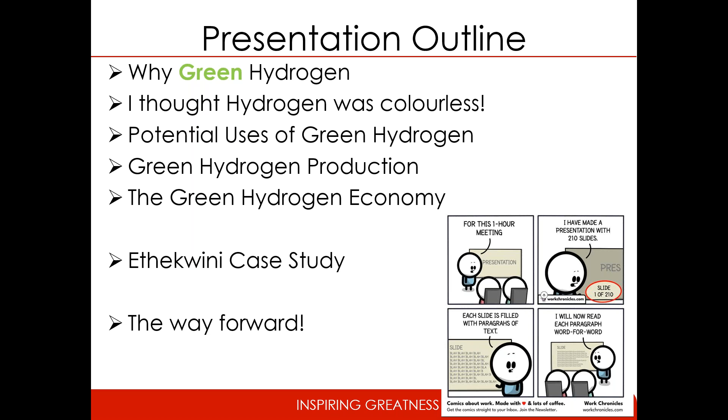We'll talk a bit about green hydrogen production in terms of electrolysis, etc., and then the green hydrogen economy, how it exists throughout the world, perhaps. Then I'll hand you over to Umeshan, who will go through an eThekwini case study, which is very relevant. And I don't think I'll say too much more about that because I think Umeshan covers it quite well. And then because I like to always have the last word, I will come back to end the session off before we have the Q&A.

So why is green hydrogen trending? Obviously, everybody knows most of the stuff. It's a growing demand for clean energy solutions, the shift towards decarbonization, and obviously advancements in technology and declining costs of renewable energy go hand in hand. We find that solar efficiency is getting better. We find that people are finding ways to make renewable energy more efficient. Hence the reason green hydrogen now is a buzzword almost. In the next slides, I'll show you specifically why those things are important.

But also the government policies that support green initiatives. They're growing not only in South Africa, but you'll see the example that I use for Japan later on in my slides, is something that is saying, look, if we want to meet the climate targets by 2050, then we need to consider very serious ways of decarbonizing our industry.

So this is the hydrogen color spectrum. You'll notice at the top we have green and pink hydrogen. Green and pink hydrogen are the only greenhouse gas-friendly hydrogen production mechanisms. Currently, hydrogen is mainly produced using coal or gas, which adds to the greenhouse gas emissions because it releases carbon dioxide as an output.

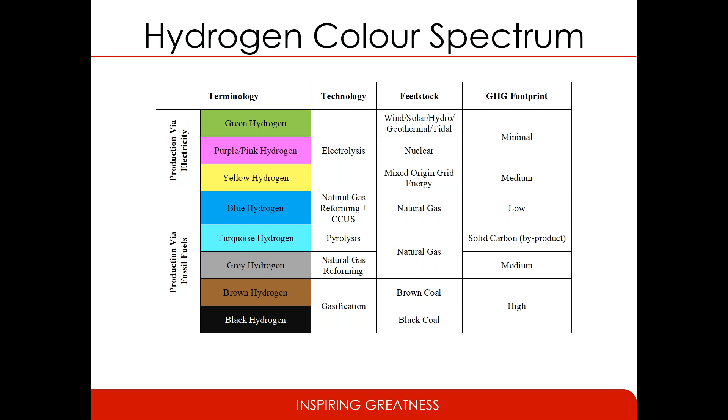But the difference here is that this is a CO2 emission-free option. So they basically don't add oxygen into the mix, and therefore no CO2 is created. So the carbon that is created is then used for nanotubes and other functions as well. But I digress. Let's move back into the presentation today.

I'm starting off by showing the United States energy mix. And the reason I'm showing it is to address the first question that I discussed when I talked about the outline. And that question was, why are we taking renewable power and using it to make green hydrogen rather than just providing energy?

Now, this is the US energy mix. And you can see in the US energy mix, electricity basically makes up 25% of the energy mix, the rest being transportation, industry, etc. Now, in industry, there are certain industrial sectors like the manufacturing of steel, for example, that are really difficult to decarbonize using electricity. And therefore, that's where hydrogen comes in.

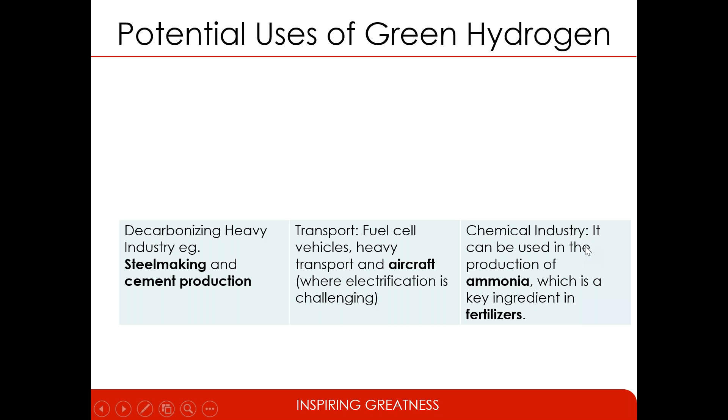So potential uses of green hydrogen, and perhaps that's where I'll discuss it further, is the decarbonizing of this heavy industry. So steel making, cement production, for example, you can now use the hydrogen directly as heat rather than electricity. And I think that's the reason why green steel is kind of also on the rise on the backs of green hydrogen. When we talk about transport, fuel cell vehicles, heavy transport, and aircraft.

Now, aircraft is, for me, like the easiest example because it's very, very difficult to electrify an aircraft. To do so, you may need batteries that are heavier than the aircraft itself, if I could put it that way. So it just doesn't make any sort of feasible, viable sense. Therefore, this is where hydrogen is kind of playing a big part, although there are plans in place for heavy fuel cell vehicles like shipping and trucking, etc.

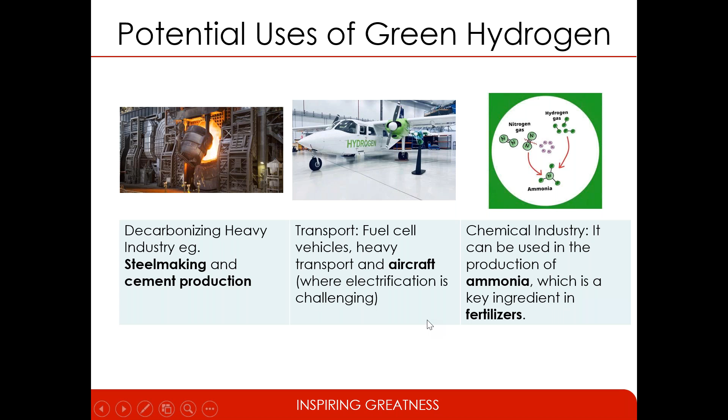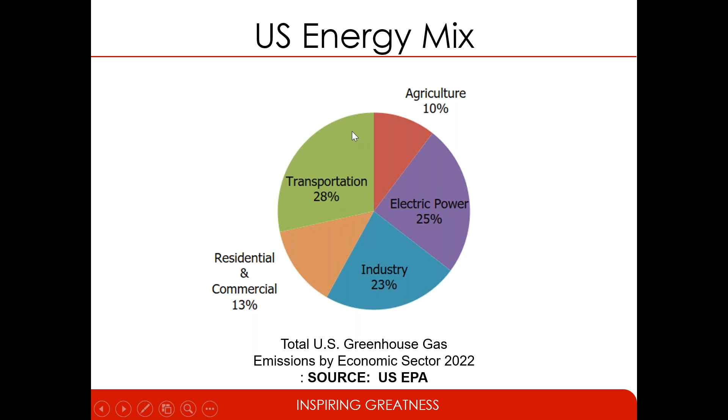As well, the chemical industry can use it in the production of ammonia, a key ingredient in fertilizers, for example. So these are the potential uses for green hydrogen. If we were to go back quickly, just to say, the idea, if you could see my mouse, is not to target this electric power, but to cut into the industry 23% and the transportation 28%. Transportation, we obviously have electric vehicles that's also helping out. So I think that's the reason why green hydrogen is making sense.

Now, I started off with America, but now we can come back to South Africa, and I'll quote a very famous graphic that we see in a lot of presentations these days. It's from Stellenbosch University, from the Center for Renewable and Sustainable Energy Studies. And as you can see, we have a growth now in terms of concentrated solar power, we've got wind power, and we've got solar power. But of course, this is our electricity generation. And what we can't see is underneath this white line is a lot of brown.

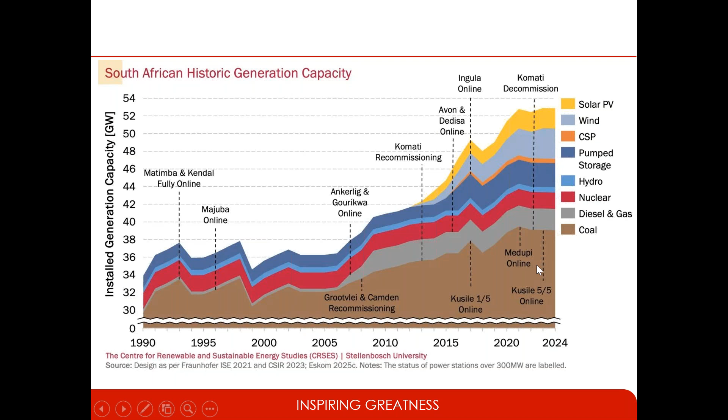So in terms of renewable power, the reason why this graph is very different from the American graph is you'll find that in our energy mix, electricity still makes up a much bigger proportion of the energy mix as opposed to industry and transportation, because of how dependent, of course, we are on coal for our electricity.

Now, when we talk about the green hydrogen economy, for me, we have to start with Japan, because in 2017, Japan became the first nation to implement a national hydrogen plan. And it's kind of obvious, it's born out of necessity, because Japan is limited in unused land, which means that Japan, unlike South Africa and other countries, can't set up gigantic solar farms like those found in Australia and China and India to decarbonize their grid or to meet their carbon KPIs.

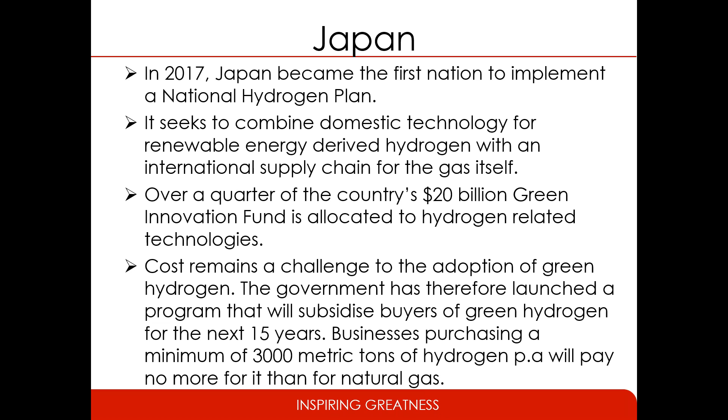Other countries around the world have similar initiatives, but we won't go through all of them in the interest of time. To talk about South Africa, South Africa's current vision is stated in the South African Hydrogen Society Roadmap, which was released in February 2022.

Establishing a hydrogen economy for South Africa is seen as a tremendous opportunity to overhaul the country's industrial sector and also assist in achieving our targets for 2050. The other thing is that it ensures that the socio-economic inequality is also alleviated. You may have heard the term just energy transition, because I'm assuming people who are in this webinar are interested in such things. So green hydrogen is seen as one way.

In fact, we are also currently writing a book chapter with the Human Sciences Research Council on green hydrogen, specifically looking at how the just energy transition can be assisted by going to green hydrogen rather than renewables only. So this roadmap establishes targets for the year 2050, but plans to implement 10 gigawatts of electrolysis in the northern regions of South Africa by 2030.

Now, I know the cynics in the room are thinking, and perhaps those are the questions we're going to get later, but those targets seem lofty because let's face it, 2030 is now 5 years away. But at this point, I'm going to say, is it any more ambitious than us building 14,000 kilometers of transmission line in the next 10 years?

My point here is not to belittle it or to say that we're not going to do either, but my point is, and I'll touch on it at the end of the presentation, is that we need to have plans in place, and not only plans and documents and more reports, but we need to start executing on them.

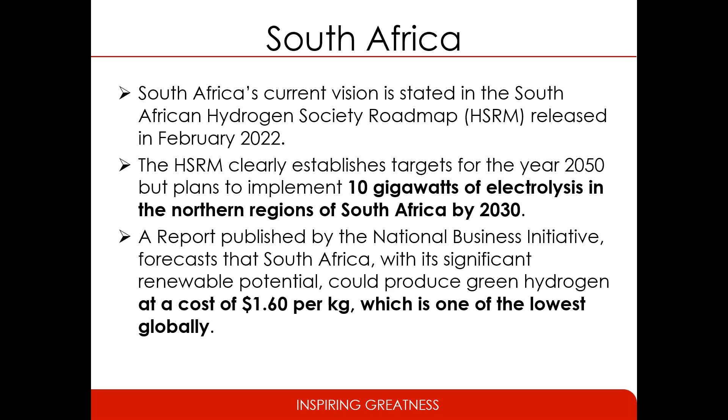A report published by the National Business Initiative forecasts that South Africa, with its significant renewable potential, particularly in the northern provinces, could produce green hydrogen at a cost of $1.60 per kg, which is one of the lowest globally. So that's in terms of South Africa. The South African projects that I'll just touch on briefly: the Platinum Valley Initiative, I think, is the most famous one. It's the big corridor that links the mining activities in Limpopo all the way down to the port of Durban.

Then we have the COALCO2-X project, which aims to utilize green hydrogen and captured pollutants from coal-fired boilers to generate value-added products such as green ammonia and fertilizers. Sustainable aviation fuels, I think we've spoken about that already. And I apologize if I don't pronounce this correctly, the Boegoebaai hub, which is in the Northern Cape.

This is a nice example of a hub that looks at a lot of different interconnected industries in a way to stimulate the economy, generate jobs in an area that doesn't have anything. And it's a large-scale industrial zone. It has 7 crucial facilities, but most important in the context of this presentation is an electrolyzer park, a green ammonia production plant, and a desalination plant.

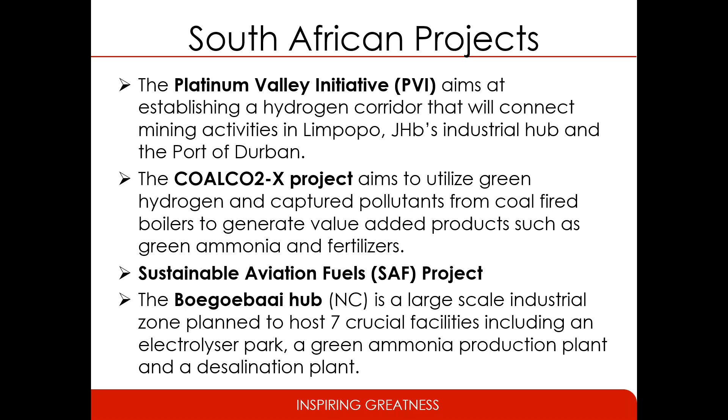So South Africa has these plans, and perhaps I'll now trail off. I warmed you up, hopefully, in terms of understanding what's green hydrogen and why we're doing it. We'll now segue to Umesh's presentation, where we talk about an eThekwini case study. And the reason why we chose to look at this case study is obviously eThekwini forms part of that platinum corridor, but also when we're designing these things, we need to understand what we're doing, why we're doing it, and should we be doing it in the first place. And Umesh's study answered a lot of those questions.

I'm really grateful to the SAIEE to afford us this opportunity to present this research to you, because research like this doesn't just belong in a thesis or in a conference paper. It needs to be shared, discussed, and I feel only then can we have any chance of it being implemented. So with that, I'd like to hand over to Umesh, who will take you through the very technical details of his study, and I'll chat to you guys later. Thanks.

Thank you, Dr. Khan. I'd like to introduce Umesh Pillay to the audience. Umesh Pillay is an electrical engineer with a diverse skill set encompassing various areas of expertise. His proficiencies include black start generation, industrial energy audits, general industrial engineering, network modeling, renewable energy, medium voltage designs, arc flash studies, and MV protection coordination studies. Umesh demonstrates high analytical acumen and problem-solving abilities, allowing him to define complex issues and devise innovative solutions meticulously.

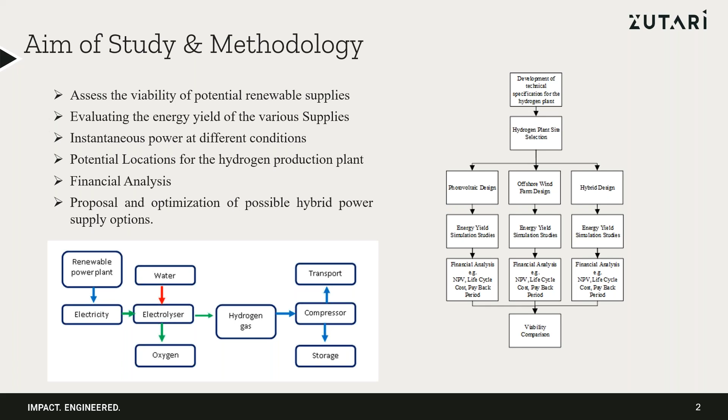Okay, so the study locality and plant requirements. I'm not sure if everyone knows that eThekwini was one of the first municipalities to release a regional hydrogen strategy. In our national hydrogen strategy, we have Cato Ridge, Richards Bay, and Durban as the hydrogen corridors. I chose to do my research based on Durban because I'm actually from Durban, so it made it easier.

Durban was also one of the first municipalities to produce a regional hydrogen plan, and the Durban port means, as I said before, the only possible use for hydrogen at the current moment is export, and I felt that would be the easiest.

For our plant, we had to look at industry benchmarks of what other plants are producing. We've seen that a typical plant produces like 2,000 kilograms of hydrogen a day.

This fact actually scared me when I saw 20,000 liters of water required, and I was like, okay, I live in eThekwini, and when I open the tap when I get home, we do not have water. How are we going to do this? Then I realized there's something bigger in play here.

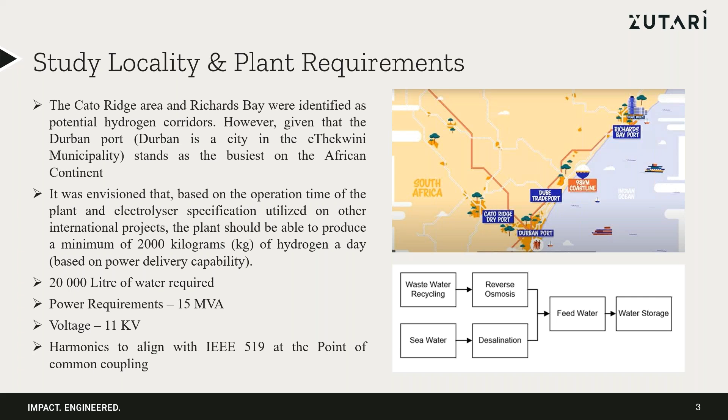Okay, let's look at photovoltaics as a potential power supply. We all understand that PV doesn't function throughout the day. So in our study, we looked at operating our plant for 9 hours from 8 a.m. to 5 p.m., a typical working day.

One thing that really made me know I was on the right track - I'm not sure if you guys have seen on LinkedIn the recent eThekwini updates. I was actually in a meeting with them, and ironically we were talking about this 400 megawatts of generation they aim to install: 100 megawatts of solar and 300 megawatts of gasification, I think. Ironically, this 100 megawatts of solar was in the same region that I had placed my solar farm during my study, so I knew I was on the right track there.

As you see from the global horizontal radiation map, Durban is relatively green, so that's about 3.6 kilowatt hours per meter square of solar energy.

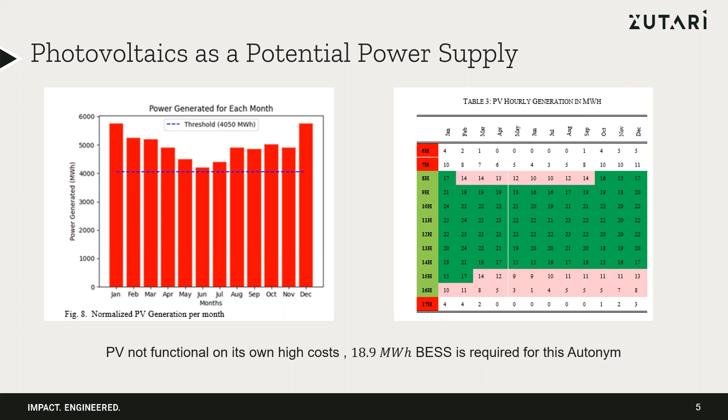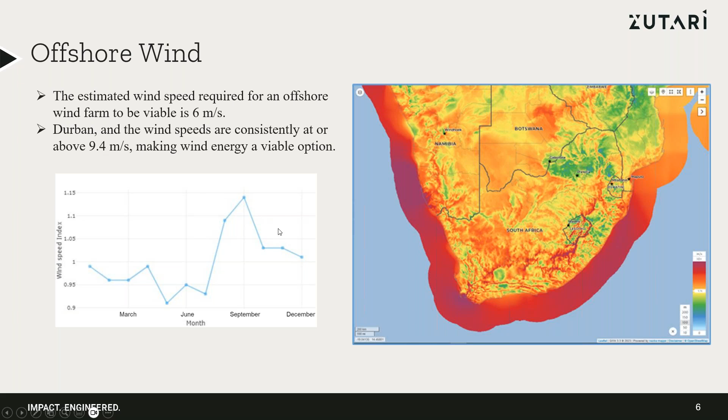So I'm very passionate about offshore wind, synchronous machines. For any offshore facility to be viable, we require 6 meters per second of wind speed. As you could see, the coast of Durban is relatively red, about 9.4 meters per second. Looking at the wind index chart throughout the year, the wind speed drops towards June, but the wind index is a per unit value, 1 of the average wind speed, so it'll be 0.9 times 9.4 meters per second, which is not a massive train smash. We can still get the instantaneous power that we require.

Okay, so here's the thing with wind. Based on the power curve, we see a cut-in speed of about 4 meters per second, and we have 6. Looking at the power curve and extrapolating your points, you get 5.5 megawatts of power per turbine. I think to fulfill our 14.3 megawatts we require 4 turbines, but it's actually 3.1, and it's just safer to put 4 turbines as a contingency. As you can see, there's no issues with the instantaneous power, it's all over 14.3 megawatts. Perfect, we're happy there.

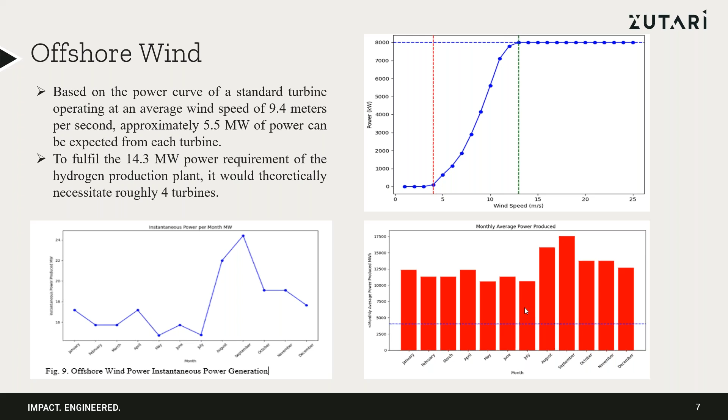But here's the issue: over generation. If you look at the amount of power we require per month, it's about 4,050 megawatt hours, but we're producing, on our worst month, about 11,000 - that's almost 3 times the generation required. So that's not good, so you have to ask yourself what do we do here. So we looked at possible solutions: PV is under generating, offshore wind is over generating. One is doing what it's supposed to do, one is not, one is doing it better, one is just there.

So the way to do this is a hybrid solution. That's our first solution, where we had a 35 megawatt solar farm tied to an LV collector, stepped up to 33 kV - general electrical engineering, step up to higher voltage to limit your power losses and assist with your voltage drops. We fed 2 renewable feeders at these plants, we actually have single line diagrams of these plants drawn out. So 2 feeders, again for redundancy, and the same with the offshore wind farm: 32 megawatt offshore wind farm, 66 kV. This is because you ideally want to transmit at your highest possible voltage within limits. Then the same, fed into 2 renewable feeders. Remember, this is 2 different power supplies.

Then we said, okay, let's look at combining an offshore facility with a solar facility. So the easiest way to do it is to take the offshore wind farm and the solar facility, and we went on with our study like that. So we looked at the energy analysis. We saw that the hybrid solution continues to generate excess power from this graph, while 2 turbines deliver the required megawatt hours but do not meet your instantaneous power. Remember, we need 14.3 megawatts of instantaneous power to run the plant, however with 2 turbines we're just getting 5.5 each, so that's 11 - that doesn't make sense. So the hybrid approach offers a balanced solution, both financially and technically better than each other.

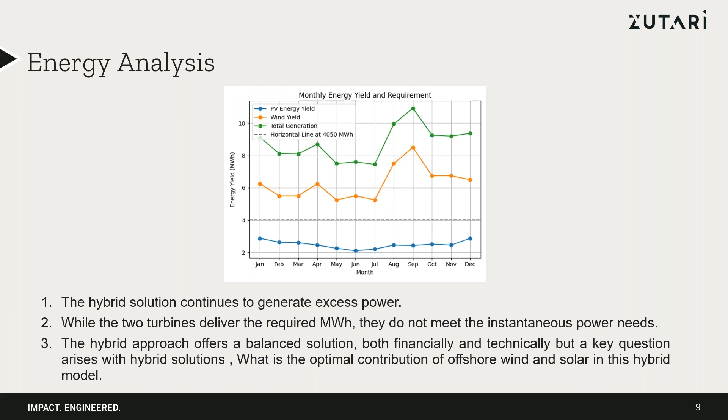But a quick question arises to us: what is the optimal contribution of wind and solar in the hybrid model? That was really the part I enjoyed of the study the most. So looking at our 3 initial solutions before we go on to our optimization, we see that hybrid is very balanced in your price, in your financial indicators.

We're looking at about 2 billion for an offshore wind farm, 800 million for a solar farm, and about 1.4 billion for a hybrid facility. As you can see, very balanced, very in the middle.

Yeah, yellow. This is the key indicator lots of people look at, levelized cost of energy, which is very important. I think it's a good indicator to assess in financial analysis of power supply. So hence I did that.

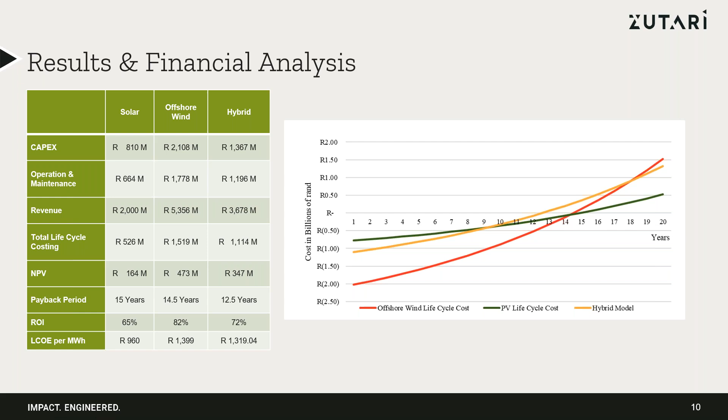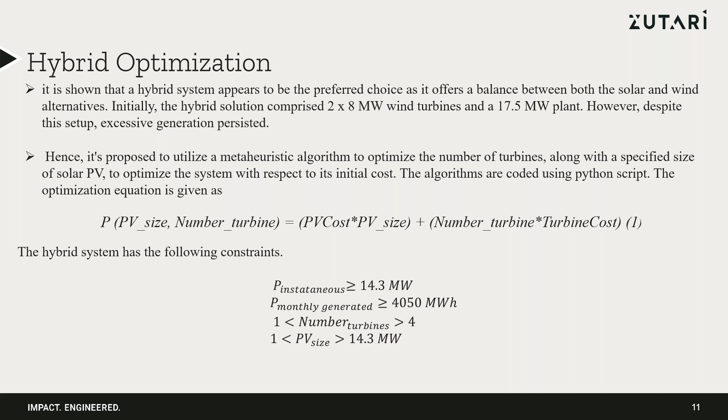So as I said before, 14.3 megawatts of power required, monthly generation needs to be greater than 4,050 megawatt hours. And obviously for us to have a hybrid solution, our number of turbines needs to be in between 1 and 4, and our PV facility needs to be in between 1 and 14.3. Otherwise it would not be hybrid, because your solution will converge to a solution using an optimal amount of wind generation.

So we used metaheuristic algorithms to solve this issue. I looked at the genetic algorithm, particle swarm optimization, and flower pollination algorithm. The reason I chose these algorithms is I've written papers before and I'm fairly experienced in it, so it wasn't something new to me.

So let's look at the genetic algorithm quickly. The genetic algorithm draws inspiration from the mechanism of natural selection, so Darwin's law there, survival of the fittest. Particle swarm optimization algorithm is considered an evolutionary algorithm. This algorithm is based on the social behavior of organisms like birds and fish, and it involves a population of particles moving through a search space, adjusting its position and experiences, aiming to find optimal solutions

to the optimization problem. Again, all this was done in Python, so we're not doing it manually. It's all scripts written, and that's how we solved it. The flower pollination algorithm was also used to simulate the interactions between flowers and pollinators to iteratively search for an optimal solution to complex optimization problems.

In the flower pollination algorithm, the potential solutions are represented as flowering plants, and the information exchange amongst flowers mimics the pollination, with the more fit flowers influencing the population more strongly.

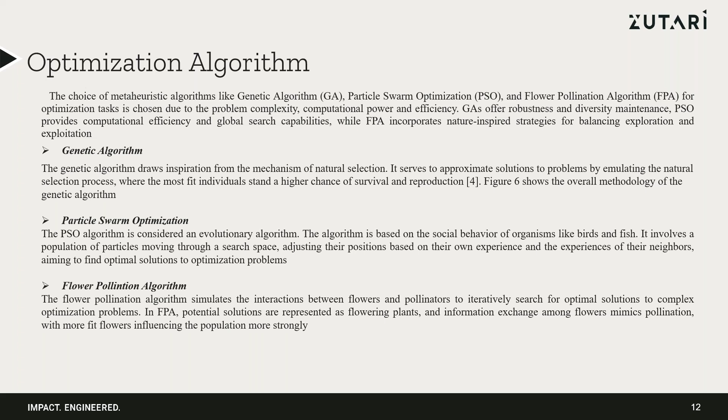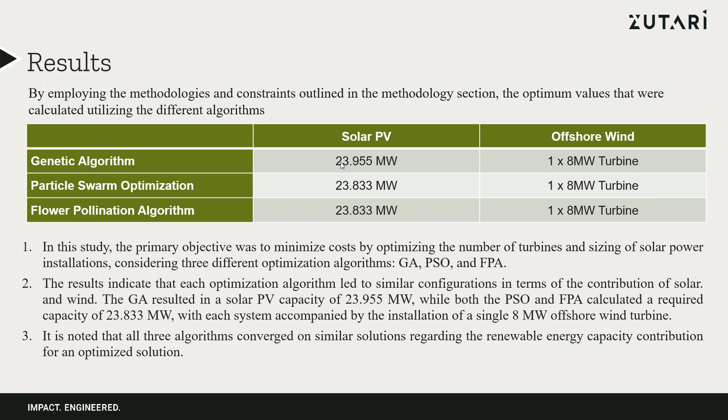Okay, so from optimization, it's clear that we need a solar facility of like 24 megawatts coupled with like an 8 megawatt turbine. And that proved to work. Because our algorithms converged to such similar values, we could say, okay, we're correct, and let's move forward in our study.

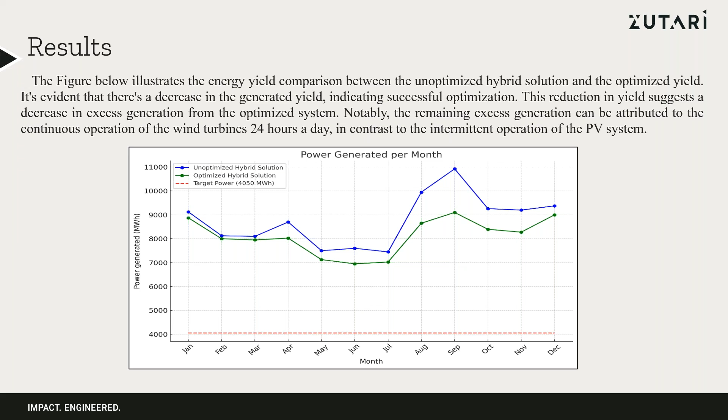Okay, this is just a graph to show you the power generated and the decrease. But remember that story about how we don't make decisions as engineers, it's the finance guys, trust fund, 65, blue eyes, it's them. So we had to do our financial analysis to see whether it's really beneficial, because you see a decrease in power in the graph, but it's not drastic enough to actually merit the optimization. So let's look at this.

Initially, capex reduction minus 21%, offshore. So why capex? Offshore wind farms are relatively expensive. The turbine technologies are hectically priced, so a reduction in the number of turbines significantly reduces the capex. Operational and maintenance saving, again, solely due to the wind farms. It's much easier to maintain a solar farm than a facility 21 k's in the ocean.

In the revenue stream, we saw a lower revenue being produced, but this wasn't an issue because remember, the excess power was being sold to the eThekwini grid as a byproduct. So this was actually revenue from the municipality. We served as an independent power producer selling energy. So this number really didn't affect us so much.

The life cycle costing increases. All financial guys look at this life cycle costing, NPV positive. Our payback period decreased by 0.5 years. This is minus 4.2%, and this is actually quite good, because you want to get your money out of your investment as quick as you can.

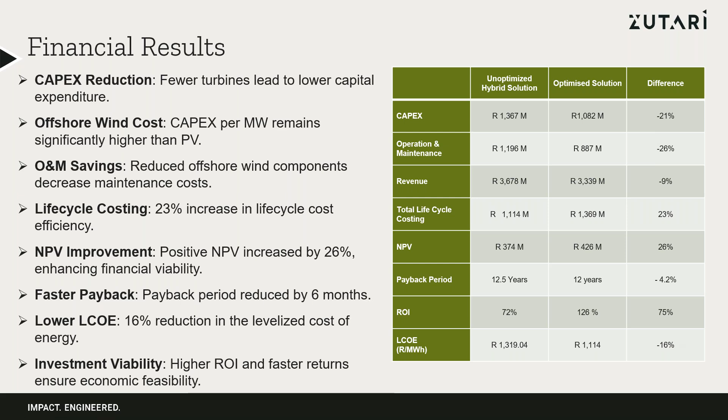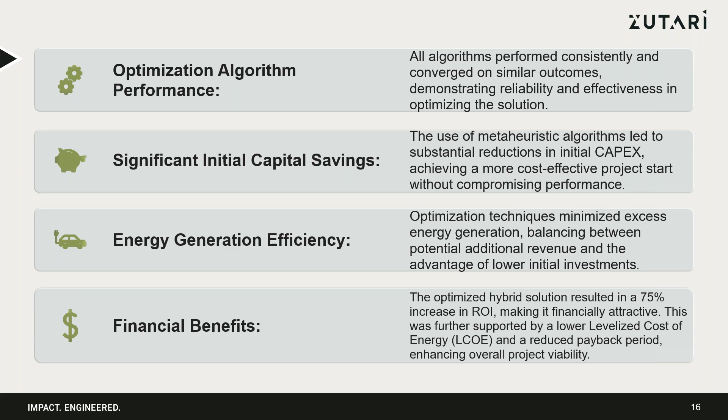Okay, so from our study, you could see that the algorithms performed consistently and converged on similar outputs. There's significant initial capex savings. There's energy optimization, minimized excess generation, balancing between potential and additional revenue, the advantage of lower initial investments, and further financial benefits.

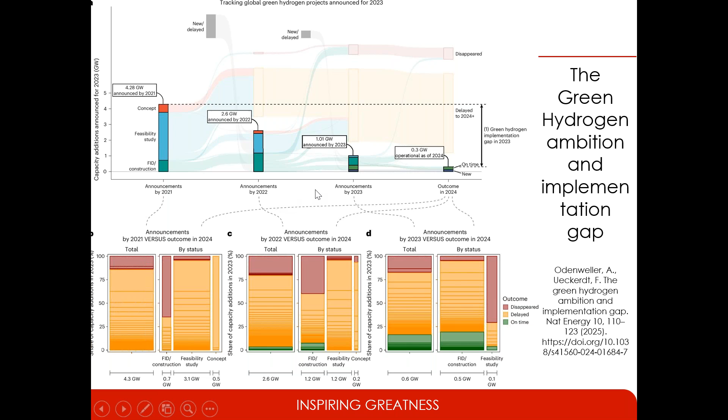So you can see as time goes by, although we have lots of announcements, what's actually being constructed is a very small fraction of that, ultimately coming to 2024, where you only have 0.3 gigawatts of new capacity installed and operational in 2023. This results in a green hydrogen implementation gap of almost 4 gigawatts in 2023. And in trying to understand how we get there, I wanted to show this because it shows perhaps where we're going wrong. I alluded to it earlier in my presentation where I spoke of perhaps not doing enough.

Now, those of you who have interacted with me in the past would know that I never leave a conversation without dropping at least one book reference. And I have to stress for all of you present that I'm not getting any commission from Penguin Publishing.

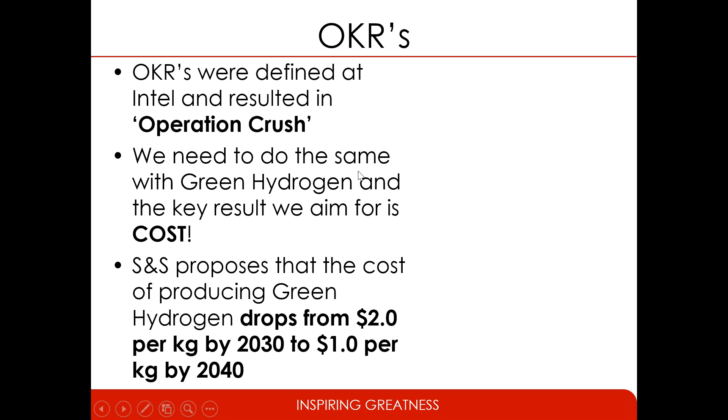OKRs stand for Objectives and Key Results. Those of you who know the Intel story will know that it was used to great success at Intel with something called Operation Crush, which resulted in total dominance in the microprocessor industry in the 1980s and 1990s. And I believe that we need to now do the same with green hydrogen. The key result that we aim for is cost.

Now, John Doerr is a guy who was at Intel, and he wrote a very good book called Measure What Matters. But relevant to this is his second book, Speed and Scale, which uses OKRs to figure out how to solve the climate crisis. In this book, he proposes that the cost of producing green hydrogen drops from $2 per kg in 2030 to $1 per kg in 2040. Some of you will remember that earlier I said South Africa has the potential to produce green hydrogen at $1.60, which puts it in a very nice position considering this book.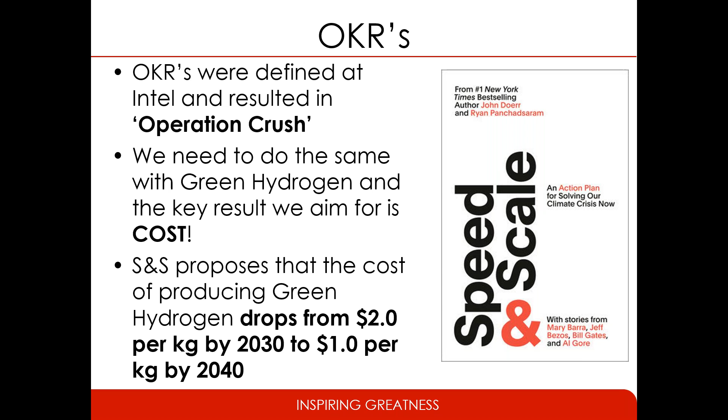We've shown our research. We've discussed the plans that South Africa has, and we showed how in most countries those plans do not always come to fruition. So in closing, we now need to change our focus. It's ironic coming from me in a webinar, but we need to talk less. We need to plan, I don't say plan less, but we've done all the planning. We've written lots of papers. If you look at the IEEE itself, the number of papers published in 2024 alone on the topic of green hydrogen is staggering.